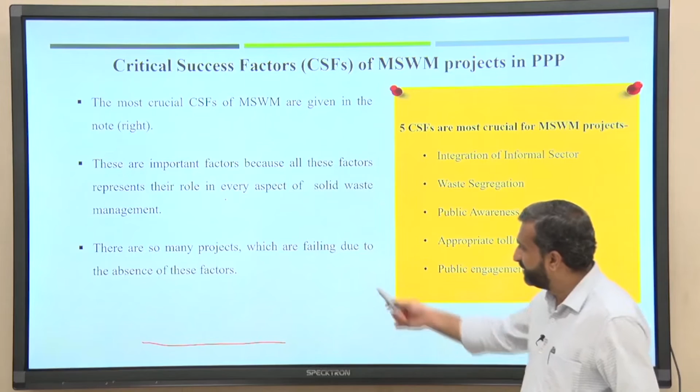There are 31 MSWM projects under PPP mode in India, established under the scheme of JNNURM or Amrut, the Atal Mission for Rejuvenation and Urban Transformation. The database can be found very easily under the PPP cell.

These were different projects for tier 1 cities of MSWM projects in India, like the first was in Mumbai, Hyderabad, Bangalore, Delhi, with different kinds of projects. For example, in Hyderabad there was an integrated solid waste management project, and in Bangalore a sanitary landfill. Different modules of PPP have been used, and different companies like Ramky were involved in Hyderabad and Bangalore, while Timarpur Okhla Waste Management Company Private Limited was in Delhi, based on data available on the websites.

In tier 2 cities like Visakhapatnam, Nellore, Jodhpur, Kanpur, Mysore, there were different PPP projects, some technology based, like a secured engineered landfill facility in Vadodara, a door to door collection facility in Dehradun, and solid waste composting and landfill facilities. In Goa, there was implementation of a 100 tons per day solid waste management facility unit at one particular location. Many private companies were engaged in solid waste management projects, thinking they would get a lot of benefits from these kinds of infrastructure projects.

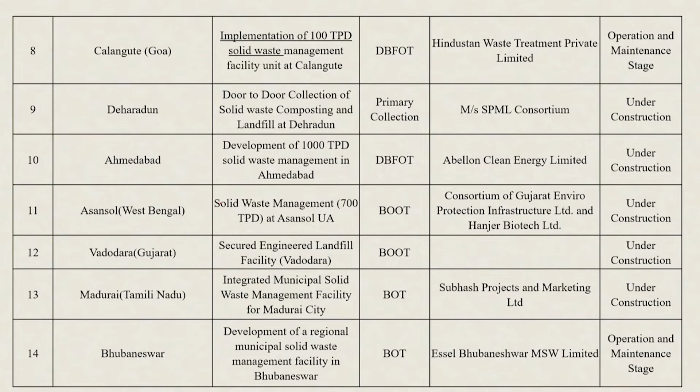Why? Because they will get a lot of money from the local people or from the local authority for collection of waste, and once they are able to treat the waste, they can easily get a lot of revenue by compost, by biogas, or by energy, and a lot of recyclable matter is available in that. So, obviously, most private companies want to work under the PPP mode with the local authorities, because

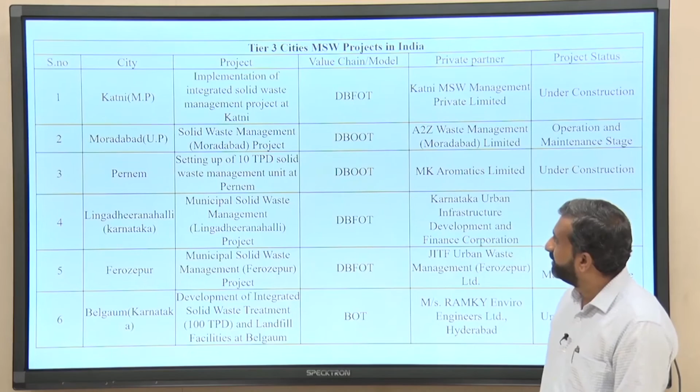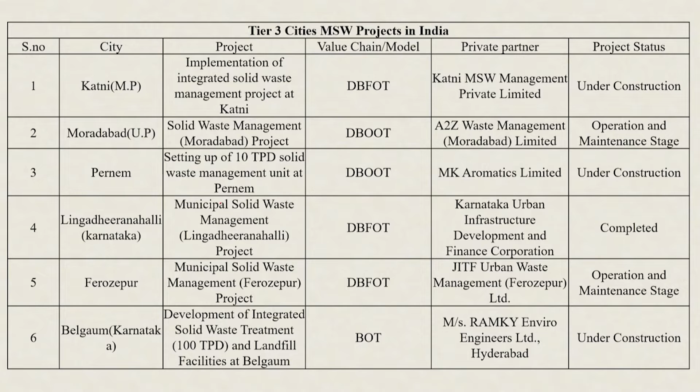a lot of benefits were there. In tier 3 cities, like a few very small cities like Katni in Madhya Pradesh, Moradabad in UP, likewise, and different projects. And there are some local companies, some very well known, like A to Z Waste Management in Moradabad, Ramky in Belgaum, Karnataka. So, likewise, Tirupur in Tamil Nadu, Varanasi.

So, this is one case study, the Gorai dumping ground. It was in Mumbai. It was a well known project, located in the western suburb of Mumbai. The area was 19.6 hectares, and it was an open dump since 1972, adjacent to Gorai creek, close to habitation, and the creek water was polluted due to inflow of leachate, and because of that a lot of degradation of mangroves and deterioration of air quality. There was no clean air for neighboring citizens.

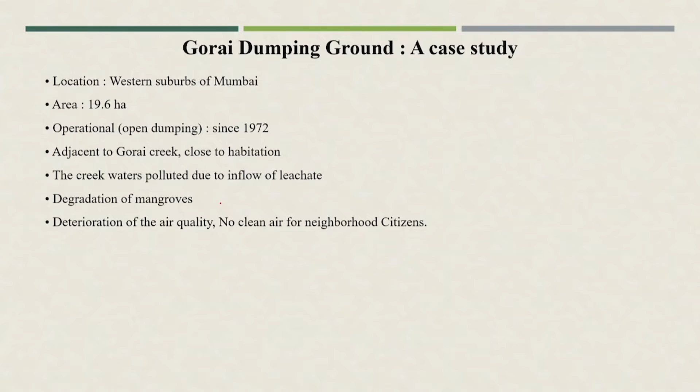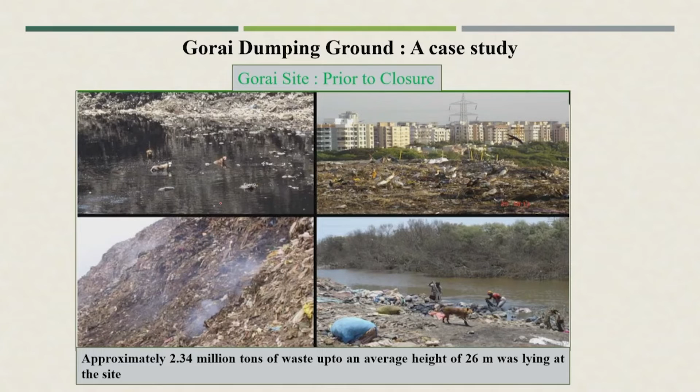These were the issues prior to closure; you can see here in this photograph. Approximately 2.34 million tons of waste up to an average height of 26 meters was lying at the site. So, a hill was completely created because of waste dumping. The scientific closure of Gorai dumping ground is the first of its kind in the country, the first project to be completed as per the waste management plan under the PPP mode.

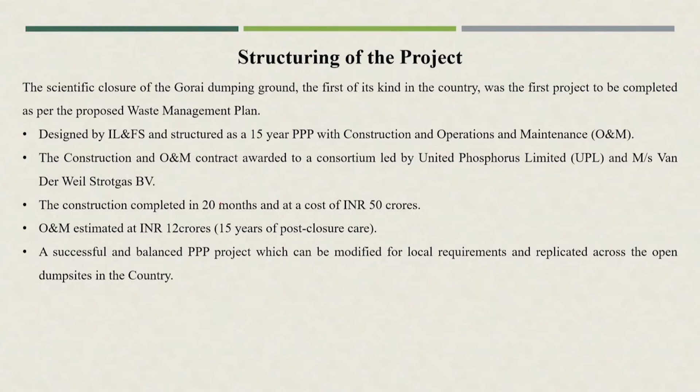It was designed by IL&FS and structured as a 15-year PPP with construction, operation and maintenance. The contract was awarded to United Phosphorus Limited, and this construction was completed in 20 months at a cost of 50 crores, and the operation and maintenance cost was estimated at 12 crores for 15 years post closure. Also, a 3 megawatt landfill gas power plant was set up on a DBOOT PPP model basis.

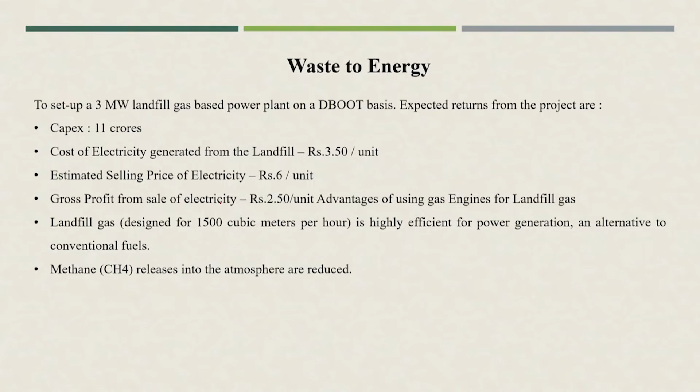The expected capex of the project was 11 crores, and the cost of electricity generated from the landfill was 3.5 rupees per unit. So, the idea was that after closure of the landfill, they will be able to collect the gas, and on that gas the waste to energy plant will run.

And the outcomes were a marked improvement in the quality of life of the local people, creation of 19 hectares of green space in Mumbai, restoration of mangroves, improvement of local health, elimination of foul odor from the waste dumping, elimination of fire and health hazards, and improvement of the quality of creek water due to treatment of leachate. And importantly, a significant improvement in the quality of marine life.

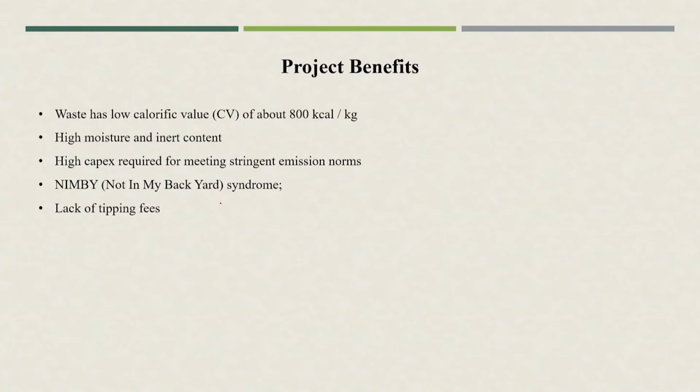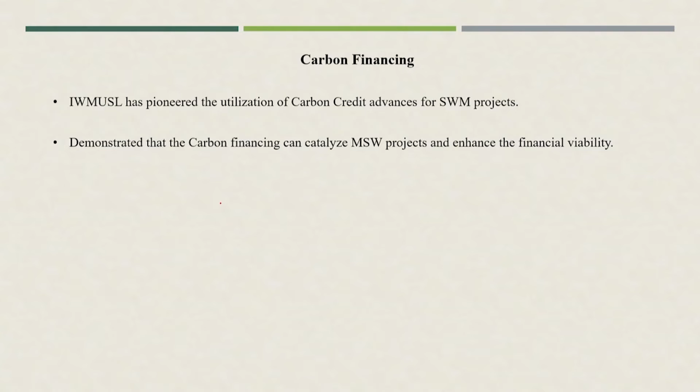The challenges were that the waste has a low calorific value and high moisture and inert content, and high capex was required for meeting stringent emission norms. NIMBY was also a problem, and lack of tipping fee; those were a few challenges. And the benefit of the project was that it will get carbon credits, and after scientific closure now you can see that.

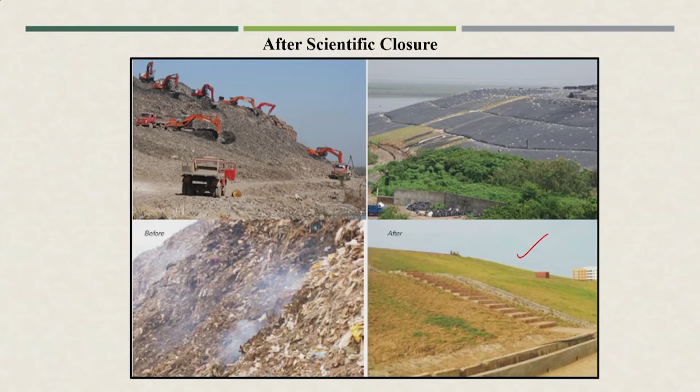So, before it was like this, now you can see how it has been converted. This was earlier, when they started. Now you can see here the entire area. This is the current Gorai dump site, how it has been converted. This is, I think, a first of its kind and successful project.

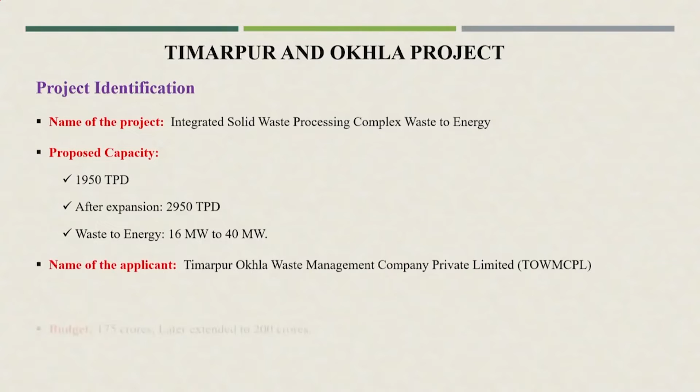Now, if you see different case studies like the Timarpur and Okhla project, that was in Delhi. It is an integrated solid waste processing complex, waste to energy. Proposed capacity was 1950 tons per day, after expansion 2950 tons per day, and the plan was waste to energy of 16 megawatt to 40 megawatt. The applicant was a private company. The budget was 175 crores, later extended to 200 crores.

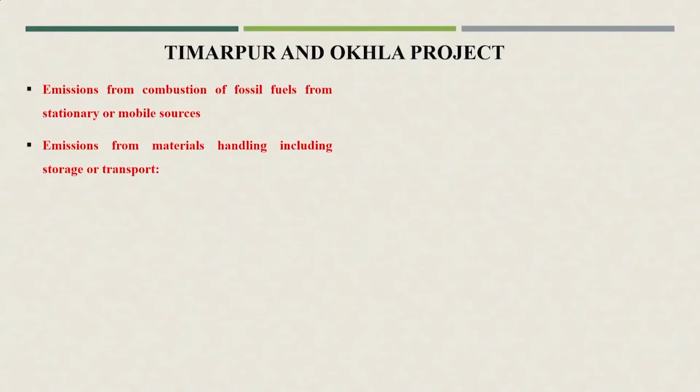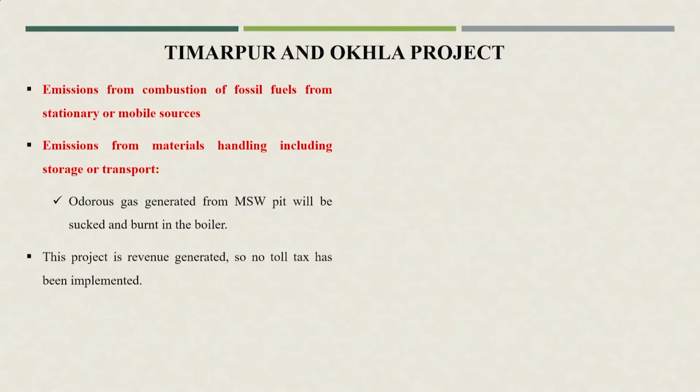For land acquisition, the land is earmarked for the MSWM facility by the local authority, so there will be no change in land use. Emissions come from combustion of fossil fuel from stationary or mobile sources and from material handling including storage and transport; odorous gas generated from the MSW pit will be sucked and burnt in the boiler. The project is revenue generating, so no toll tax has been implemented. Waste is being stored by the municipal corporation of that area. Waste sorting is not in the agreement. So, this was the news.

Now, what are the success factors of that? A lot of employment has been generated for the local people.

Pre-installation of pollutant related equipment, pollutant treatment equipments. There are a lot of political supports also, because they were generating 26 megawatt electricity.

Now you see the failure factors of that: the faulty logic and poor assessment of its socio-economic and environmental implications, unavailability of EIA report to the public, inadequate or unreliable waste characterization or quantification, and protests against the plant. The local habitations were in Sukhdev Vihar and other close areas. There was a lot of protest against the plants.

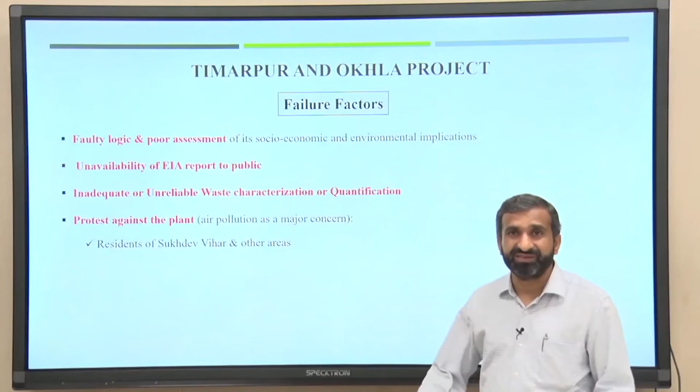So, if you ask me what is the major problem in this particular project, it was the inadequate and unreliable waste characterization and quantification data. See, for any city you can think about, like it is producing 500 tons per day waste, and characteristic says that 50% is a dry waste or combustible material.

So, you can easily say that around 200-250 tons will come to the incineration facility, but without having the proper characterization, how much moisture content that dry waste will have, how much is the volatile percentage in the dry waste itself. Dry waste is not like everything is combustible. You need to have proper characterization.

Even the quantity also, I think this kind of data is most of the times unreliable, because already in one of the modules I explained how difficult waste quantification and characterization is, and this is one problem on the technology side.

But on the operation side, if it is not segregated at source, and the entire mixed waste is reaching the waste to energy plant, how is it possible to go for combustion of mixed waste, because 50% is only dry, but the remaining 50% is wet or maybe inert material which is not volatile or not combustible. And having the segregation facility at a centralized facility is not possible at all.

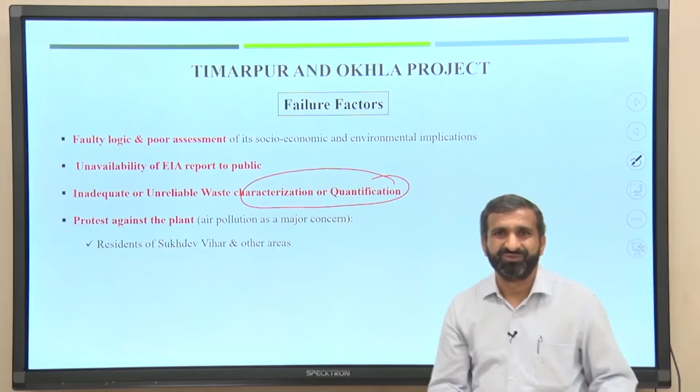Now, another project, the Coimbatore project, was an integrated solid waste management project, and project capacity was 815 tons per day, scheme was JNNURM, and concession period was 20 years. The work given was source segregation and transportation to the transfer stations. That was the task of the local authority, and the private sector would do the treatment facility and disposal facility, and the private sector was asked to construct the sanitary landfill and compost plant. The compost plant capacity was 375 metric tons per day.

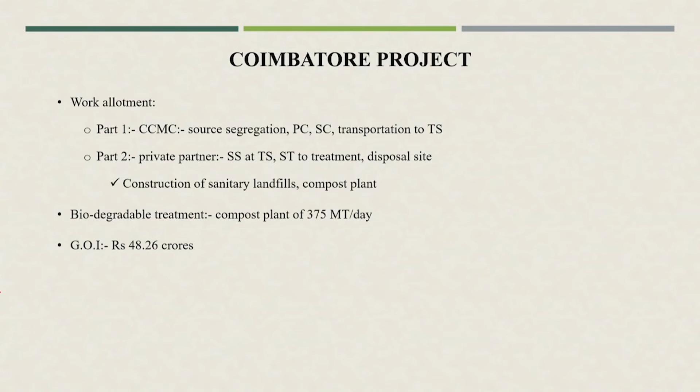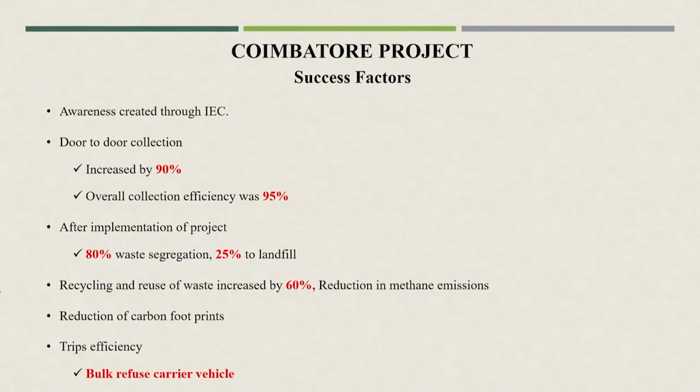So, the success factor was good, because source segregation was there, door to door collection increased up to 90%, overall collection efficiency was 95%. After implementation of the project, 80% source segregation, only 25% was reaching the landfill area. Recycling and reuse of waste increased by 60%, and reduction of methane emission, obviously less waste was reaching the landfill area, and reduction of carbon footprints, and also the trip efficiency, as bulk refuse carrier vehicles had been used.

But if you see the failure factors, the primary collection issues like absence of waste storage system at source, improper segregation, inadequate area coverage service, insufficient transfer stations, less scope of revenue generation, an intangible method for gauging service delivery, and feasible routes were not designed. So, these were some failure factors of the Coimbatore project.

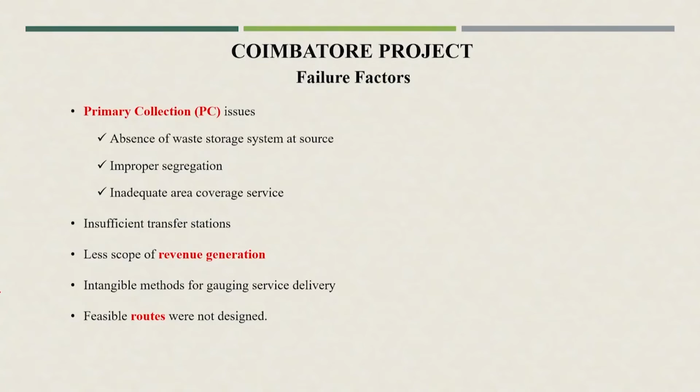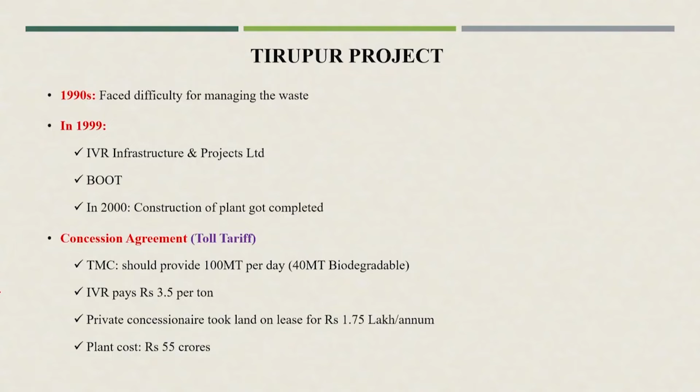So, the success factor was that selection of technology was done by taking waste characterization into consideration. Organic matter content was more, and involvement of the local community was strong, and they gave more cooperation to the project. Skill development training was given to the people in the local area to equip them with required technical skills by the local authority and also by the private sector.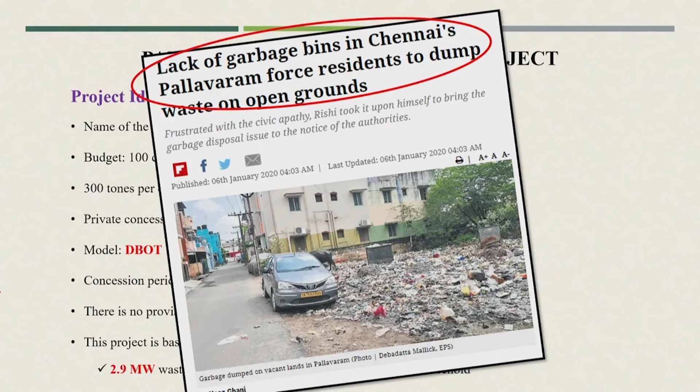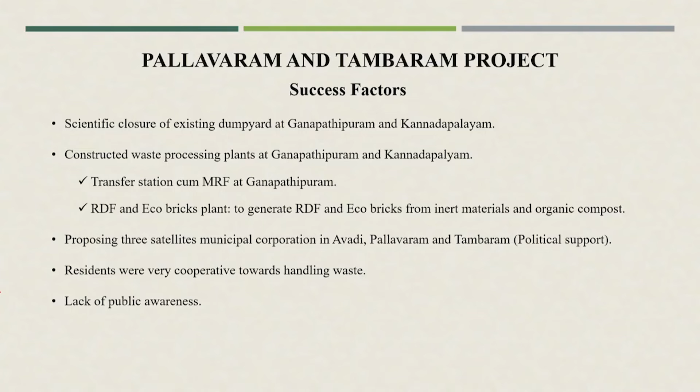So, what was the success factor here? Scientific closure of the existing dump yard, and constructed waste processing plants in particular locations, like a transfer station cum MRF, RDF and eco brick plant. Proposing 3 satellite municipal corporations in particular locations. Residents were very cooperative towards handling waste, but there was a lack of public awareness.

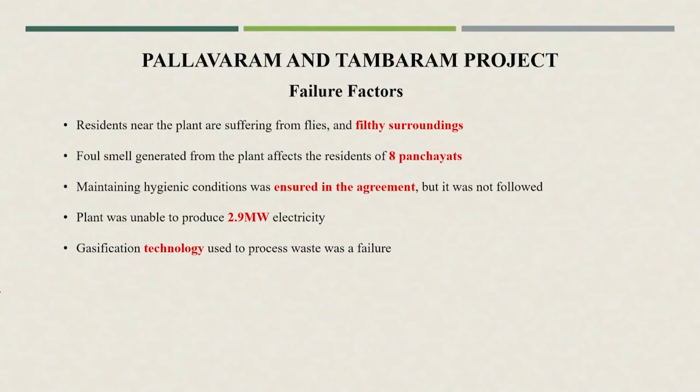But the failure factor was that residents near the plants were suffering from flies and filthy surroundings. Foul smell generated from the plant affected the residents of 8 panchayats, and maintaining hygienic conditions was ensured in the agreement, but it was not followed. The plant was unable to produce 2.9 megawatt electricity, and the gasification technology used to process waste was a failure. This was very important to share here. Gasification technology was proposed, and I already explained in one of the modules that these gasification projects are not that good for commingled or mixed waste.

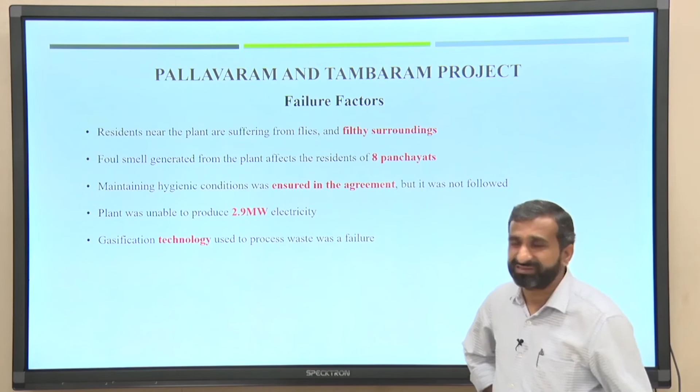Now is a very popular one, the Hyderabad project, where project capacity was 3,800 metric tons. This is also in the JNNURM program. It's a very good amount of budget. The success factor was good coordination between various teams managing the different value chain because of centralized control. There was accountability on the part of the private party. There was success in creating public awareness in the zones covered by the private partners, and there were environmental considerations, as bioremediation of existing dump sites was included as an essential criterion in the concession agreement.

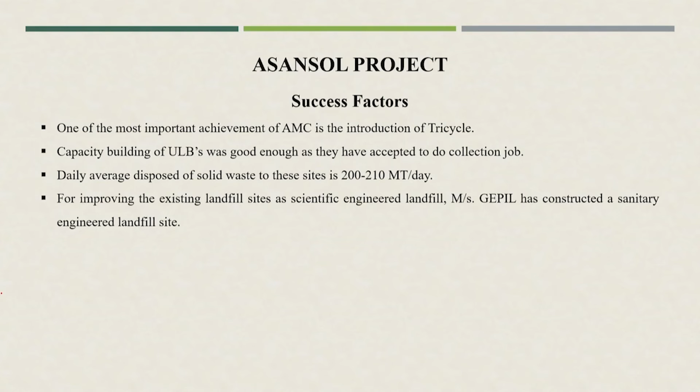Now is the Asansol project in West Bengal. Project capacity was 200 to 210 metric tons per day. Budget was 156 crores under the BOOT model. Success factor: one of the most important achievements of Asansol Municipal Corporation was the introduction of tricycles for primary collection, and the capacity building of ULBs was good enough as they accepted to do the collection job. Daily average disposal of solid waste at these sites was around 200 to 210 metric tons per day. For improving the existing landfill site, the private sector will construct a scientific engineered sanitary landfill.

But the failure was that there was no support from the political leaders in the particular state. Problems arose with primary collection; workers are not properly trained and they do not perform their duties properly. Insufficient number of bins, and wrong placement of dustbins influenced by political leaders, which created disparity among the people. No proper awareness about how to handle waste. The number of workers engaged for collection is not sufficient. Non-economical location of dump sites, they are far from the city. No centralized pattern of duties allotted to the workers.

Like this was a project in Chandigarh, project capacity 500 tons per day, budget 30 crore under the BOT model. The main objective of the private concession was to convert MSW to RDF.

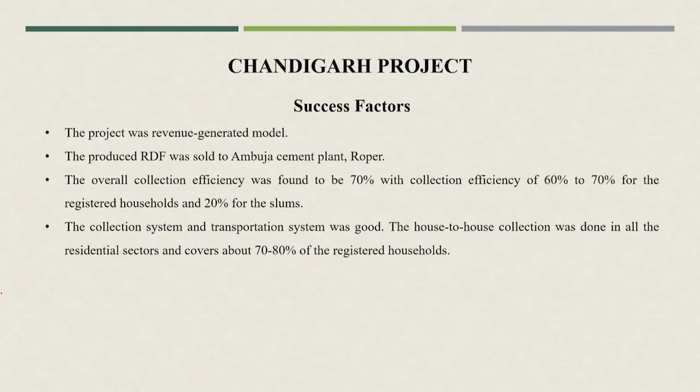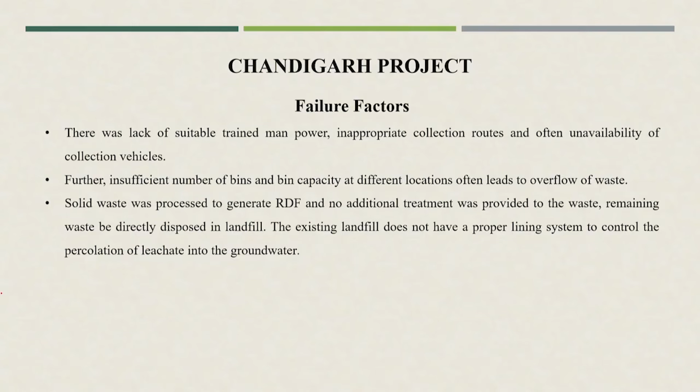But the failure was that there was a lack of suitable trained manpower, inappropriate collection routes, and often unavailability of collection vehicles. Further, an insufficient number of bins and bin capacity. Solid waste was processed to generate RDF, no additional treatment was provided to the waste, the remaining waste was directly disposed in the landfill, and there was no proper lining, no proper sanitary condition was maintained in the landfill area.

Why? Because, again I am explaining, this entire solid waste management is not only the technology side or only the management side, it is a combination of both management and technology, and financing was also one of the important issues under the waste management program. See, all the technologies are well known, literature is available, whether you take anaerobic digestion, composting, incineration, RDF, recycling, all the technologies are popular, but the major issue is how best you will be able to collect segregated waste. So, you will require a lot of awareness in the local area, because people still do not want to work at the waste collection sites. Even getting manpower is not that easy, and once you get it, whether they will continue the same task is also not certain.